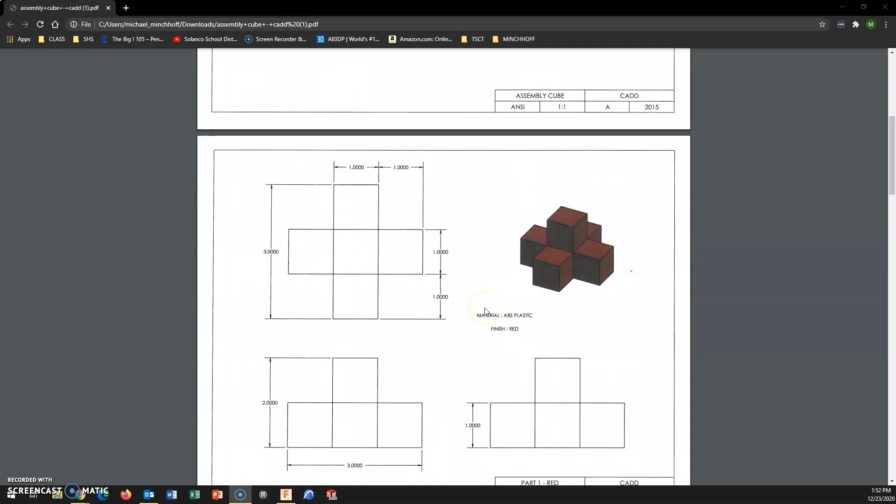Alright, in this tutorial we'll take a look at creating our first assembly using Fusion 360. In the end, we're going to end up with these 5 components and assemble them into this cube. So first off, you have to go through and make each individual part. Set the color. Hopefully it's dimensionally accurate, because if not, you will have what's known as interferences, which is something we will check for.

So first thing we need to do is make all 5 individual parts. We can't just make parts, we have to actually turn these into components. The good news is you can take any part and turn it into a component. Once it's a component, we can insert this into a design and then start to assemble these together. So we'll take a look at first creating a part and turning it into a component.

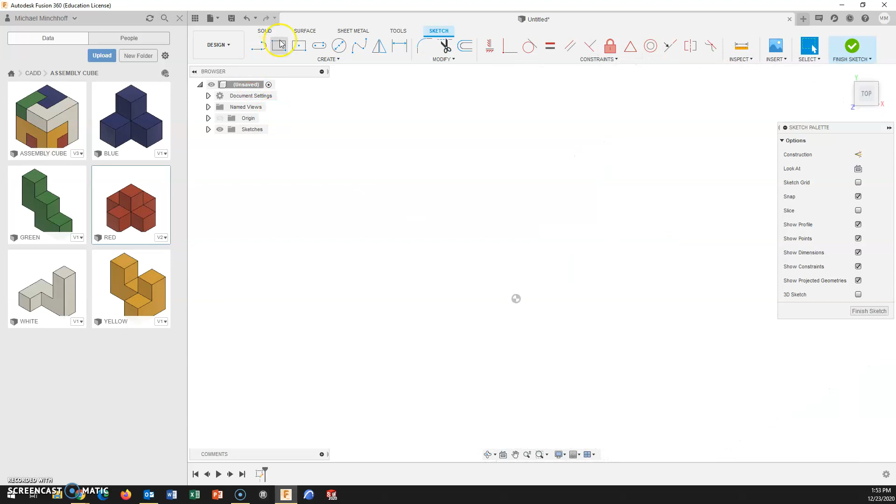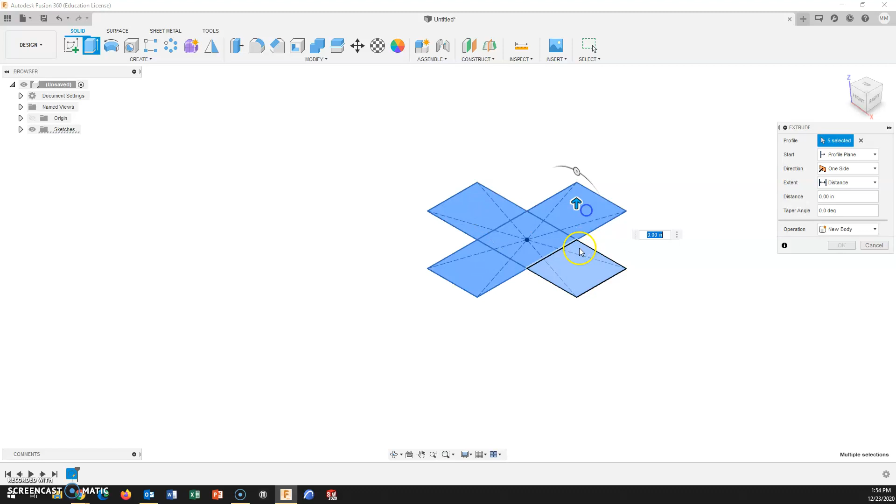So I'll start with creating one of these parts. I'll take this red one for right now. A couple rectangles, some quick easy dimensions. Part construction is not supposed to be difficult here. It is the assembly. We do know that this is 1 inch thick, and it has that part that sticks up out of the top. And that is 1 inch tall.

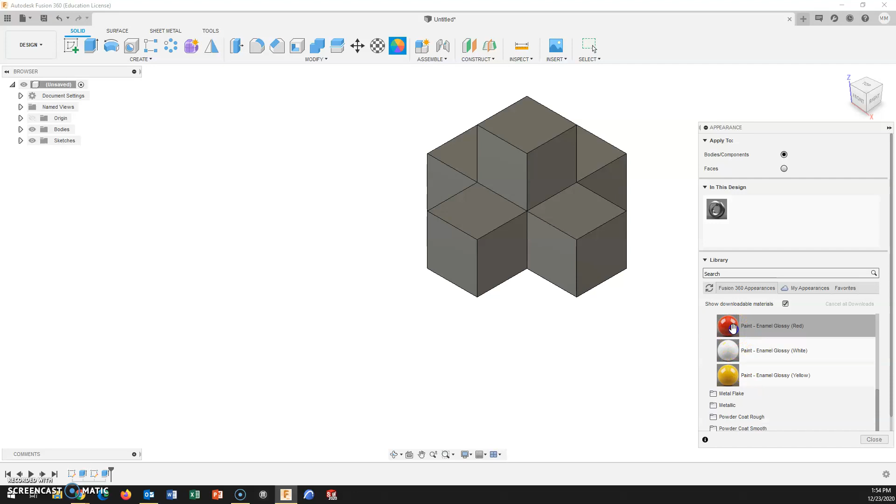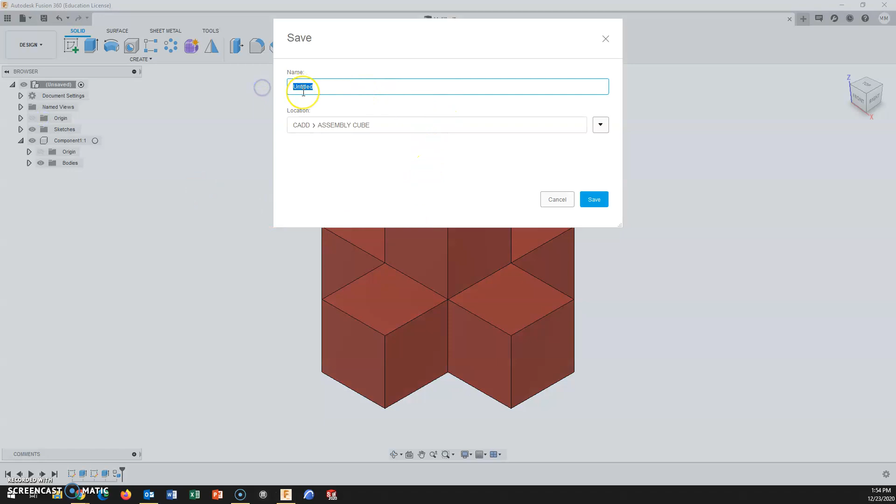We're going to set the color. These colors are here. I just used paint. And we can paint the entire thing. Alright, so I have this red part, but right now it's not a component. One way to change these into components is to go to Bodies, right click, and create this as a component. I can still come back and I can edit this, but now it's listed as being a component, which will allow me to bring it into another design. So I'm going to save this, and we'll call it Red 2.

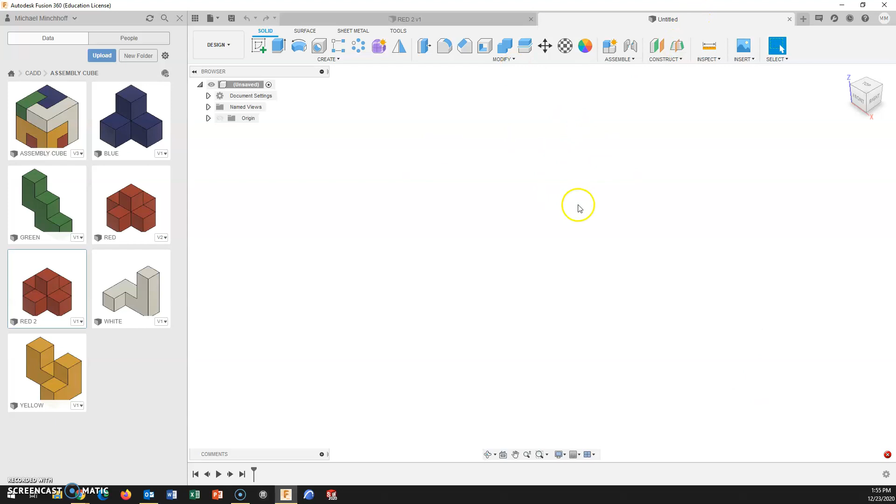So when I start a new design, I now have the ability to bring this in. Well, I'll show you what's going to happen. I can't bring it in because I need to save this file first. This is something with Fusion 360. They want to know what this is called first. So I'm going to call this something like Assembly Cube. This will be my second one. Now I can insert this part in here. I can change the orientation, but I would start with this one because all the other parts somehow match up with this one.

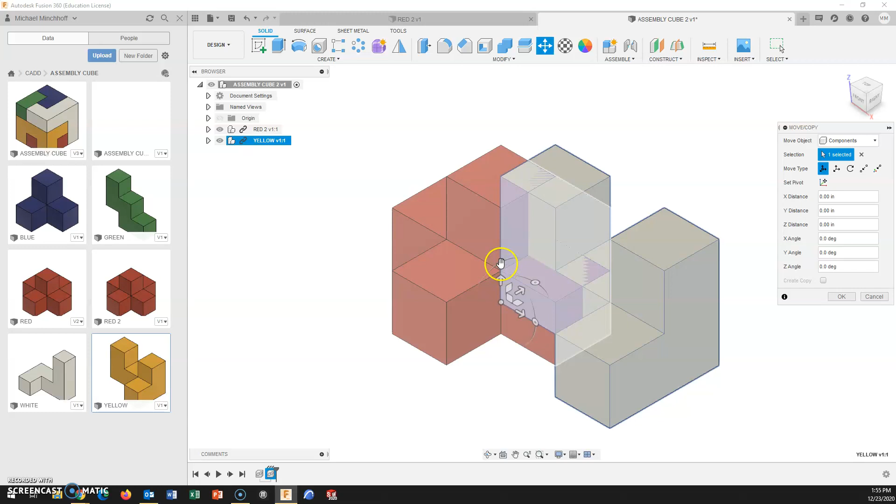From here I'm looking to add more components. So let's take this yellow one for example. I'm going to insert this into the design. Well, I need to rotate this actually in 2 axes. I can do this numerically. I much rather prefer flipping it. But make sure that you are flipping this in terms of 90-degree increments, at least for this design. And I'm going to change it on this axis too. I guess it is on that right axis.

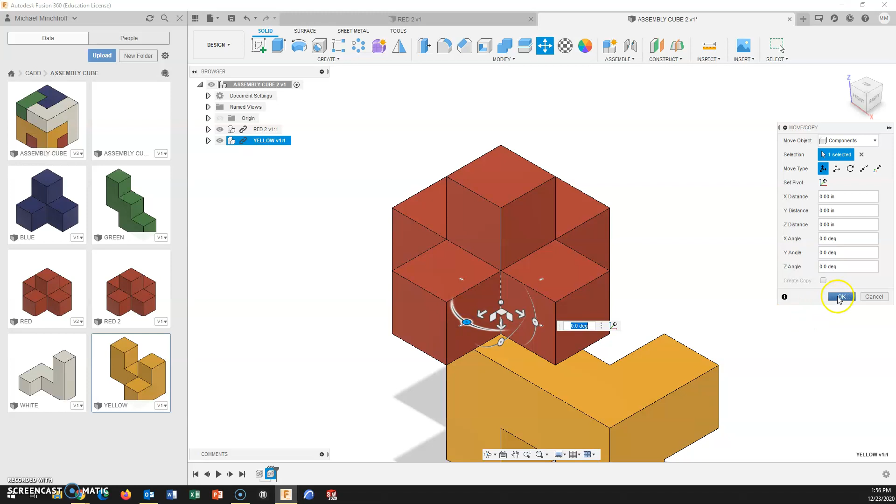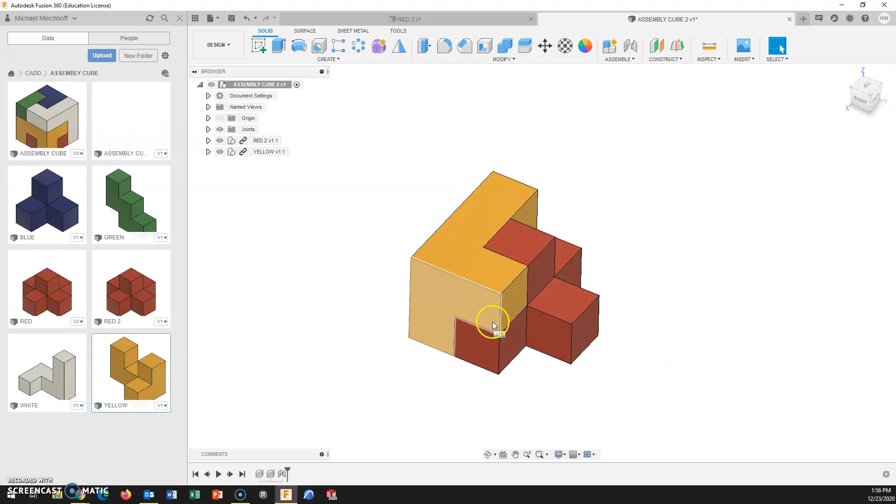What we are going to perform is what's known as a rigid joint. We're going to pick one point on this that corresponds to another corresponding point on this part. Being that they're rigid, they won't be able to move apart, turn, slide. So I'm going to take one point and this corresponding point, and they'll line up. And right now I'm set. I don't want any spacing in between. I don't want them to slide back and forth. This is the symbol for being a rigid joint.

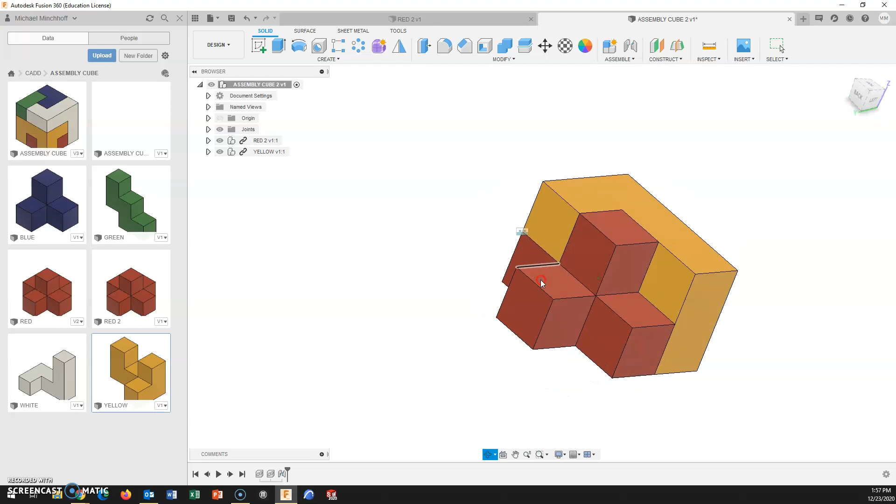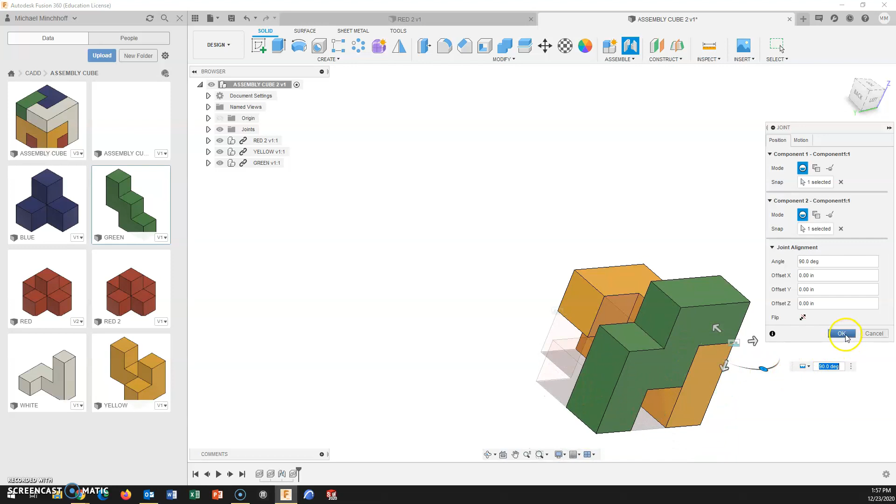So looking at the diagram here, maybe I'll bring this white one that lays across the top. Actually, that's probably not a good one to bring in next. Let's bring the green one in. The green one steps across this back. So I'm going to bring this part in, and I do need to rotate it. I'll rotate it on this axis, and I'll rotate it on this axis. 90-degree increments. Now I'm looking to align these two together. So this corner here and this corner here would be good ones. I could do this inside corner and this corner here. Either way, I'm going to get these to be a rigid joint, and they're all lined up.

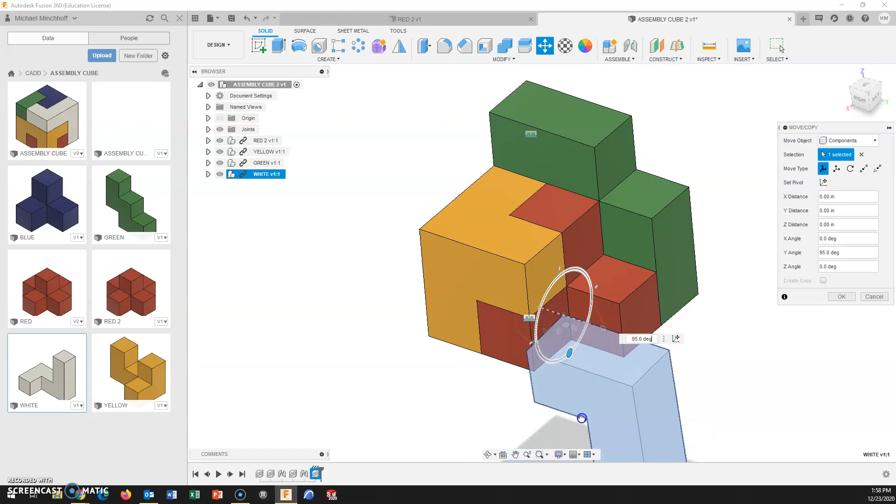Let's bring the white one in next. Insert. I need to rotate this one. Not that axis. I can rotate it again. Let's try this axis first. Yeah, it's better. And now I'll rotate it. Want to find like points. So this corner and this corner line up. And all I need to do is drop that little blue one in here.

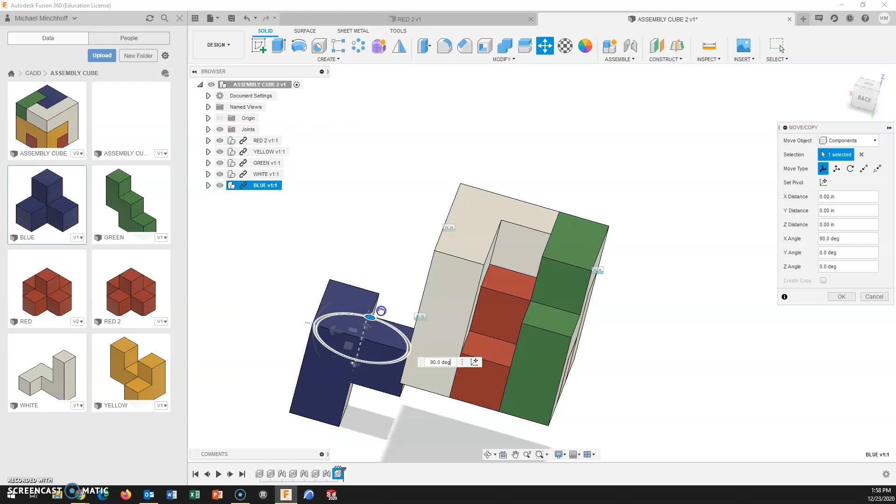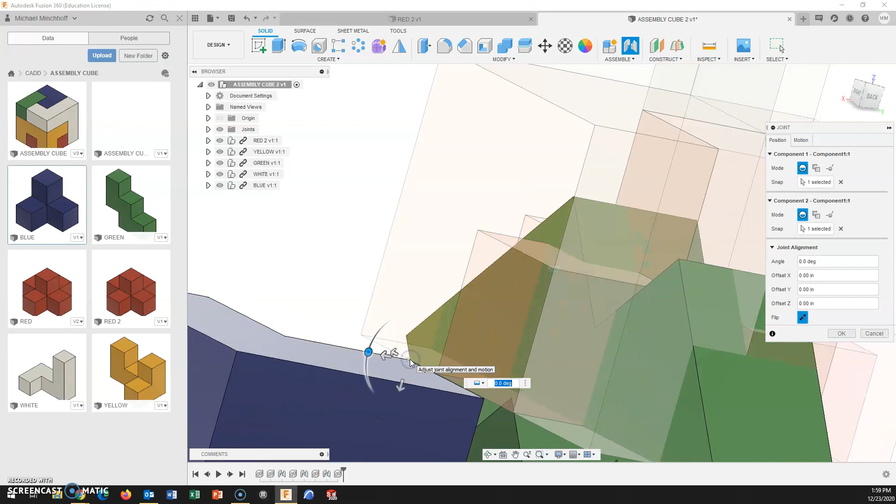Let's move this out before I start to rotate it. So it rotates down, and we'll rotate it there. Okay? And again, like points, maybe the top of this green one to this corner here. That should work. This one down here somewhere. Uh-oh. Let's pick a different point. Say this point to this point. There we go. Whoop, flipped. Why'd you flip? Let's try that again.

Let's take this component off. Starting off, your best bet in terms of fixing a problem would just be to bring it in again. Let's try that again. Let's join this corner to this corner. Did it again. Why is it flipping in that direction? Only when I want to demonstrate.

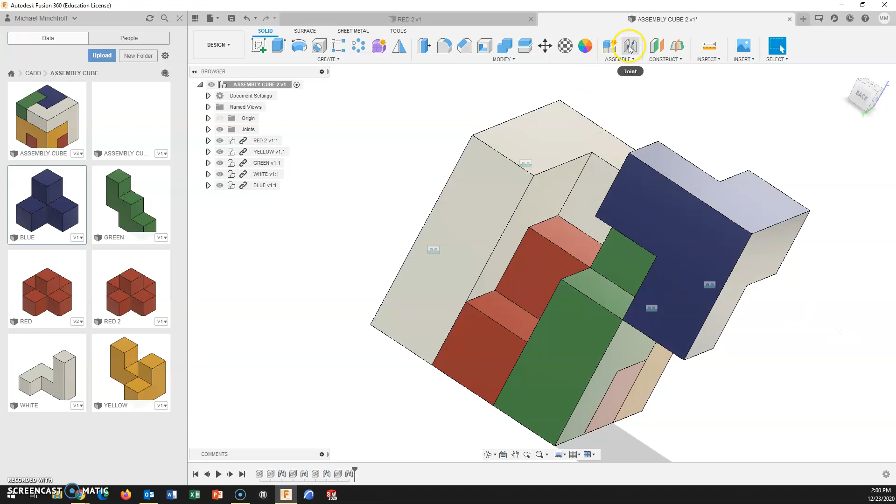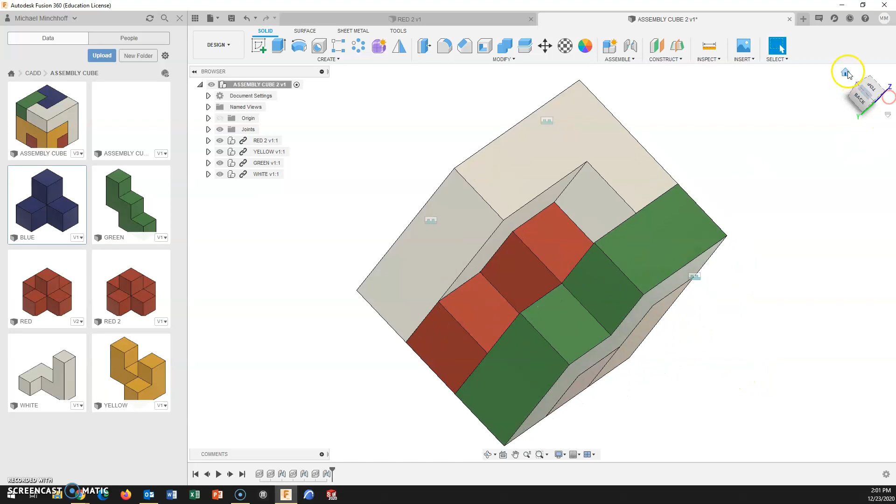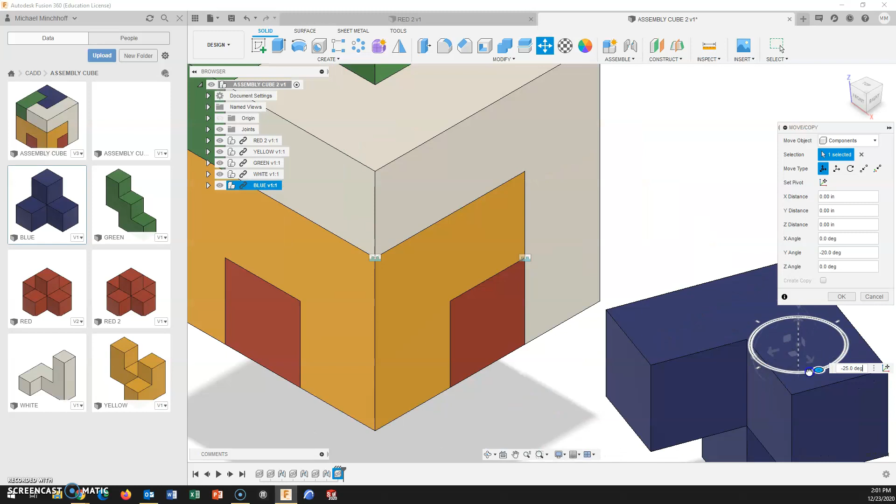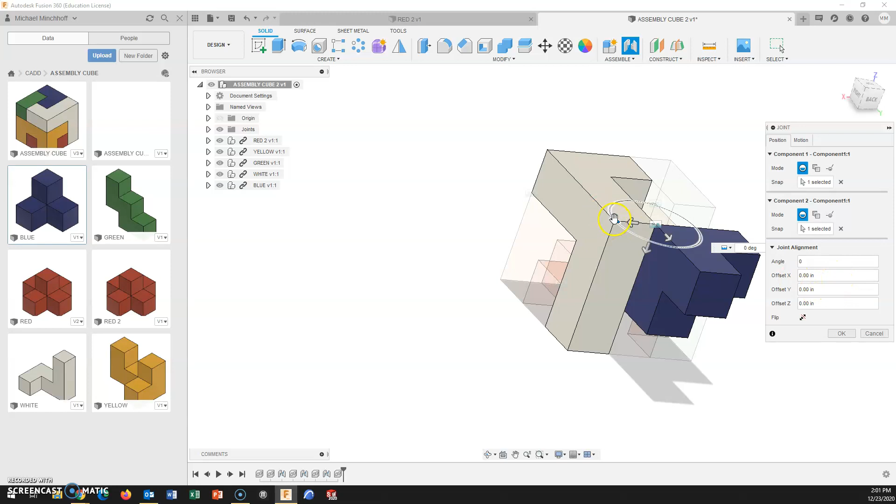Now let's try to join these. Let's do this. Of course not. Oh, we got this far. Not going to stop now. Okay. Why do you want to flip? I had it.

Alright, it should be stuck in there. There we have it. All these components stuck together. I can't bring individual parts in. That's why we need to make it a component.